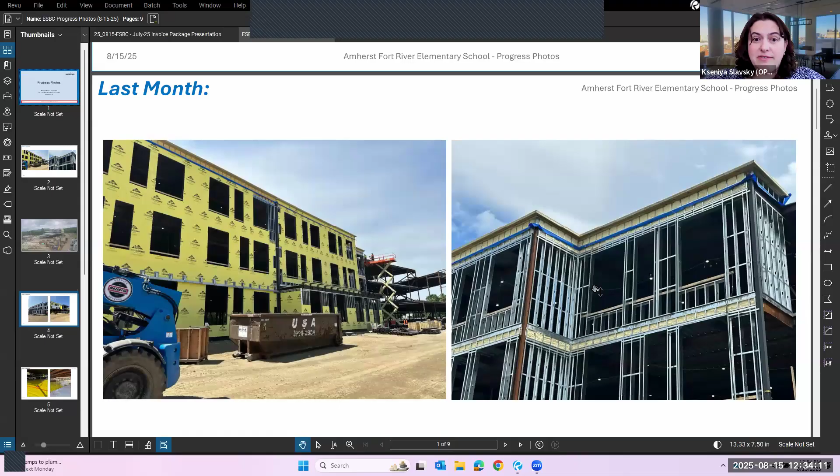And the visual impact of the changes will speak for itself. Go ahead, Connor, maybe one slide at a time. So is Tim talking us through these, or are we just going to flash through slides? I can talk through them if that's my cue, certainly.

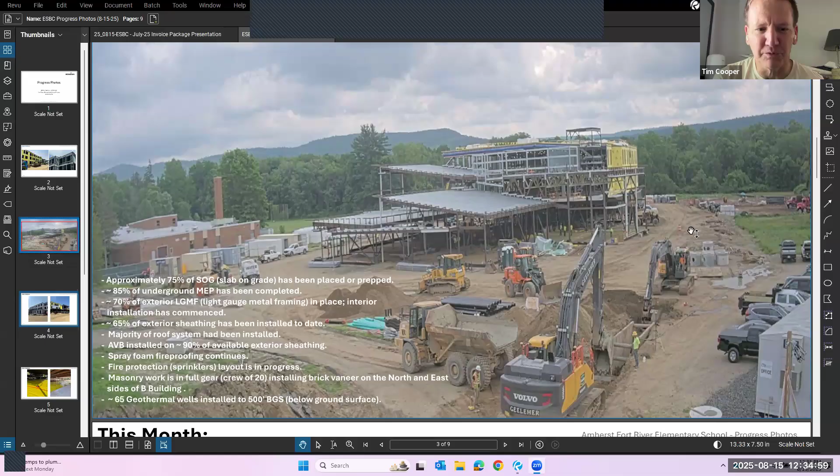Is this last month's photo or now? The exterior steel structure is complete at this point and has been for a little while. You can see the exterior walls being framed. To date, they are about 60% enclosed on the building. As we go through the other photos, you'll see the progress. I would read the text along with the presentation, but I can't really read it with the low contrast on my screen.

Here you can see the sheathing has made it all the way to the east end of the building. The library is on the right. The yellow is the exterior sheathing, that's the exterior wall, and the white on the left is the air and vapor barrier applied once the sheathing is up. In the lower left corner of the picture, you can see the masonry has started at the northwest corner and is all the way up to the second floor. You're on the north side of the building, so it's in shadow and you can't really see the contrast of colors, but they are progressing nicely.

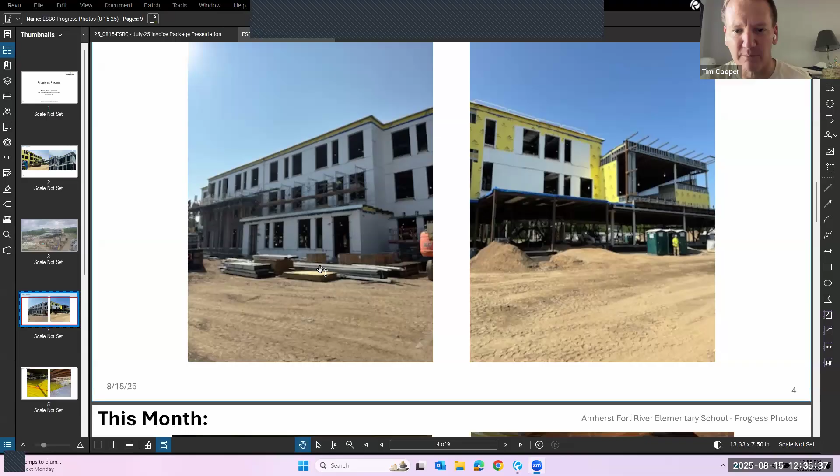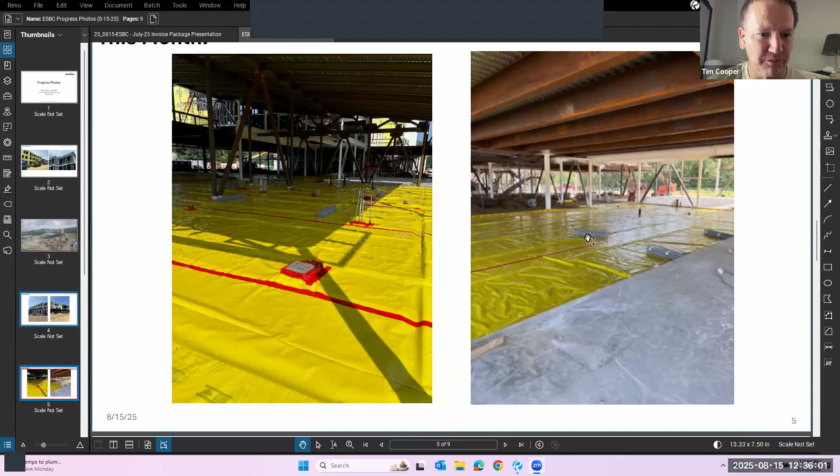Here is preparation to pour the slab in the administration area in the picture on the left, and the cafeteria on the right. With these final slab pours, all of the floors in the building will be cast, and the concrete portion of the job will be done. That should happen in the next few weeks.

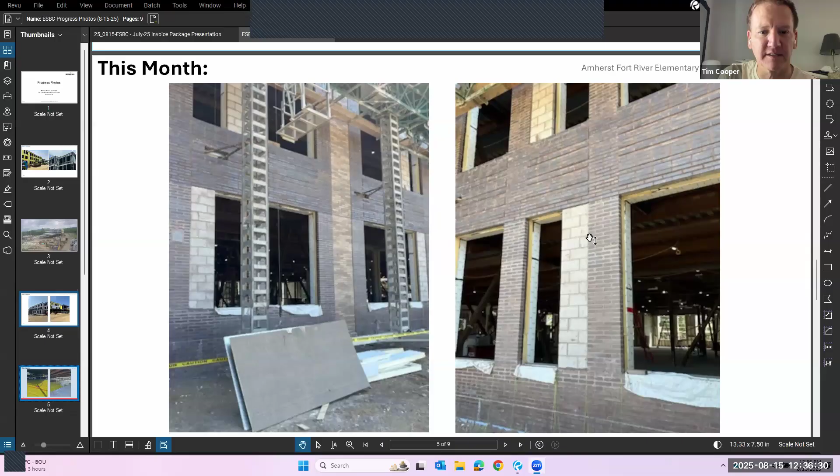Here's a better look at the brick going up at the north and east of the building, so you can get a better sense of the colors and contrast you will see. I should note that on the window openings where you see the larger format concrete block, that is not the final product. There is a tile that will be applied that you may remember from the renderings, a series of very vibrant colors that will give the whole building a little bit of pop in the final condition.

Here are pictures inside. On the left is the corridor; those hangers are all the mechanical piping that's going to be above the ceiling. On the right is actually the third floor adjacent to the cafeteria, which will be a couple of offices and the literacy library in the background. It's an interesting shot of the steel and all of the bracing that we have there.

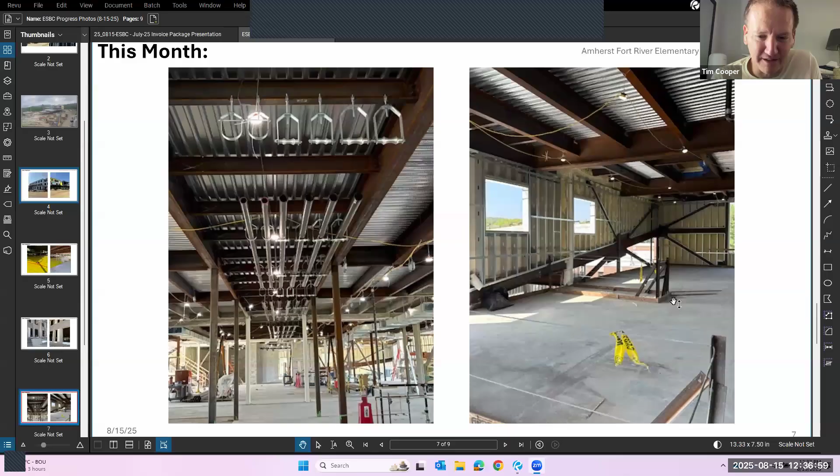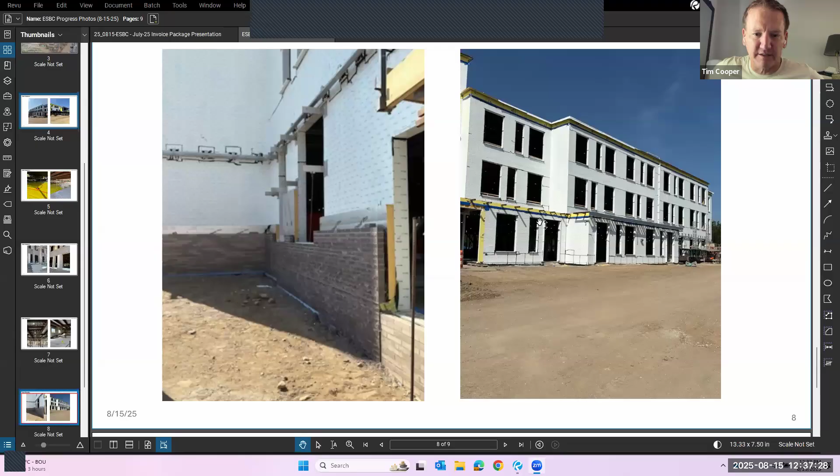And then onto the last slide, the next site tour will be Tuesday, September 30th at 3 p.m. So if you're interested in attending, please send me an email, and I will be creating a calendar hold for that as well. The first site tour happened in July, and it was very well attended.

Everybody enjoyed being there so much that it went on. We had really good participation. So we had started that one at 4 p.m., but because it went on as long as it did, I think we were keeping the construction crew there a little long. So we decided going forward to move it up to 3 p.m.

Hopefully that still works for everybody. Do please let Connor know who wants to attend and when we're available. And if there's particular interest to participate from some folks that the 3 o'clock hour just never works, please let us know that too, and we'll make adjustments.

Ksenia, I just have a question. The school will be in session that day, correct?

I expect so. So my question is, if people come, we should try to park off-site is what I'm thinking, that you won't necessarily, or will you have places where we can park?

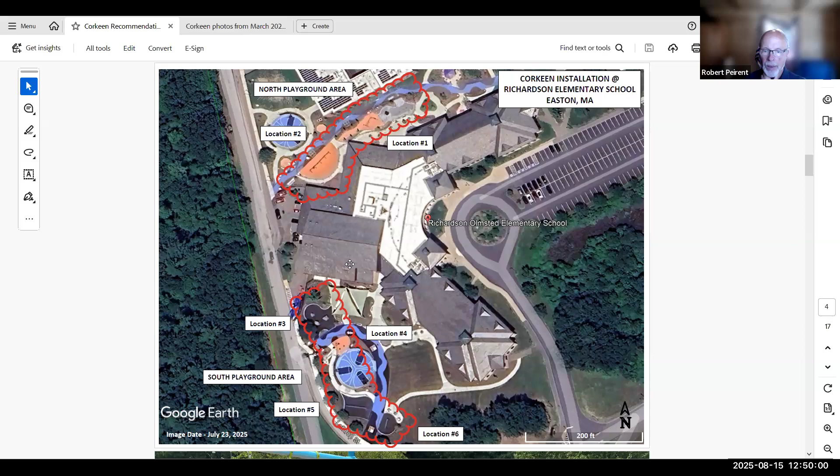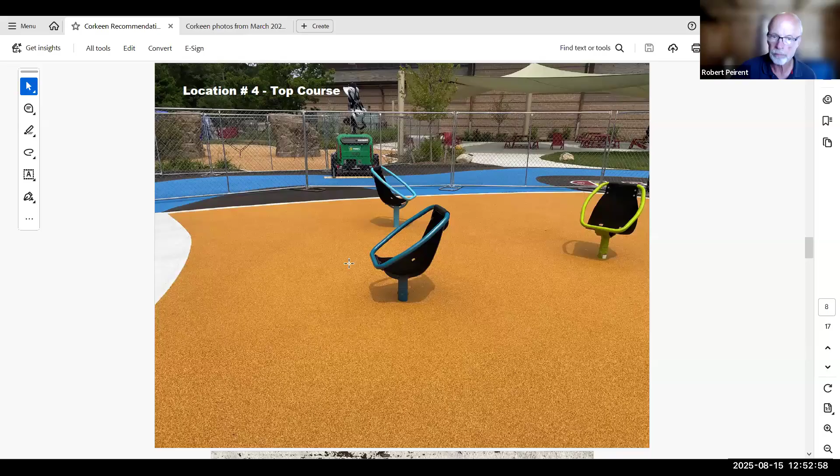So what they're doing in Easton and the repair areas is doing all the work at night during cooler temperatures. That's great. On the other hand, the ability to install things carefully and properly, with lighting etc., at nighttime can be tricky. But it was mainly the temperature that I picked up on here.

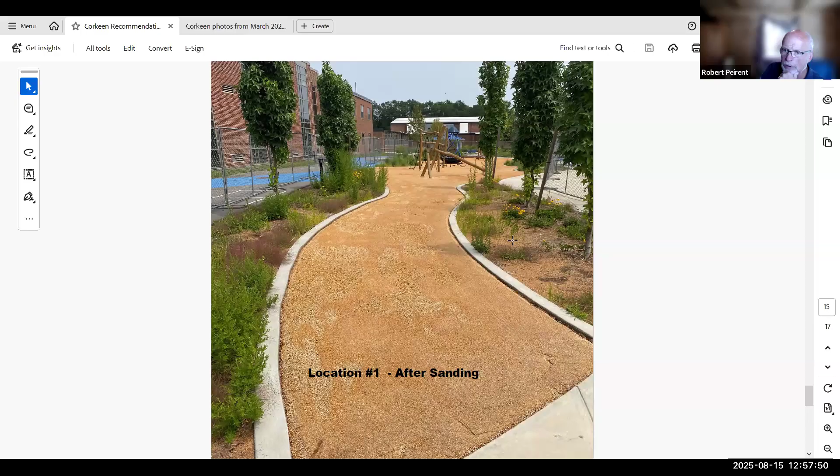Again, this is another location where they took a significant piece of the top course off with the intent of replacing it.

Same thing again - cutting out some sections and sanding other sections. In some areas they completely replaced the base course. So this is a location where they took all the base course out and put in new base course, and it has new top course on there as well now.

So that's what I saw. I spoke with the director of facilities, and I spoke with a designer. The designer hopes that this works in Easton - she's not sure, based on what she's seen to date. The director of facilities is skeptical.

He says as a minimum, it takes very good, extensive training for the installation and very careful installation, very careful monitoring of the installation. And that's the only way he sees there's a chance for the product to be successful at their location.

So that's what I saw in Easton. Let me talk a little bit about Ameren, where they are today, as I understand it. What they've told me is that they are retooling the way they sell and install the product. They are coming up with a different approach in terms of certifying installers, people that have been trained and are willing to put their name out there and say they're an Ameren certified person. They're in the process of doing that.

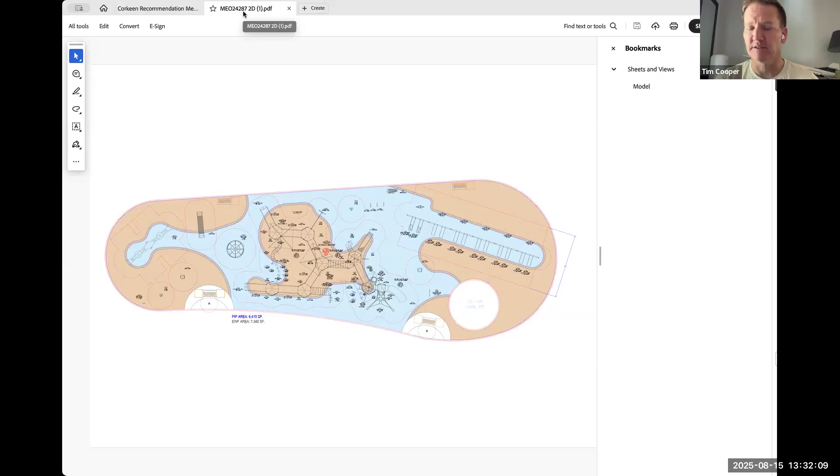This is certainly a viable approach. You'll find if you survey schools in Massachusetts that this is used not infrequently, usually as a cost control measure, since wood chips are much less expensive than poured-in-place. This is a way to get accessibility to the play equipment without covering the whole surface. The question remains: if the concern with poured-in-place rubber is leaching, off-gassing, or contaminants, does using 50% of it address those concerns? That's not for us to decide, but all the approaches—engineered wood fiber, poured-in-place rubber, all wood fiber, a hybrid system, or all poured-in-place—are certainly viable. It's just a matter of weighing the pros and cons and the committee deciding what they want to do.